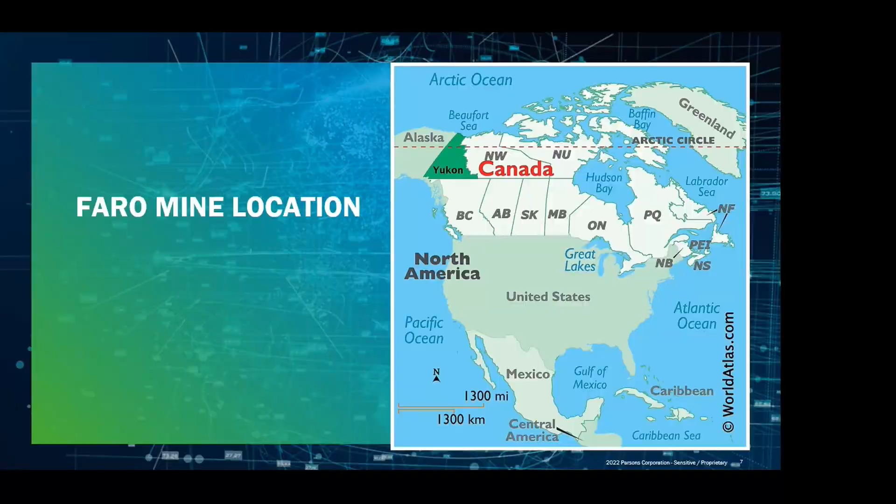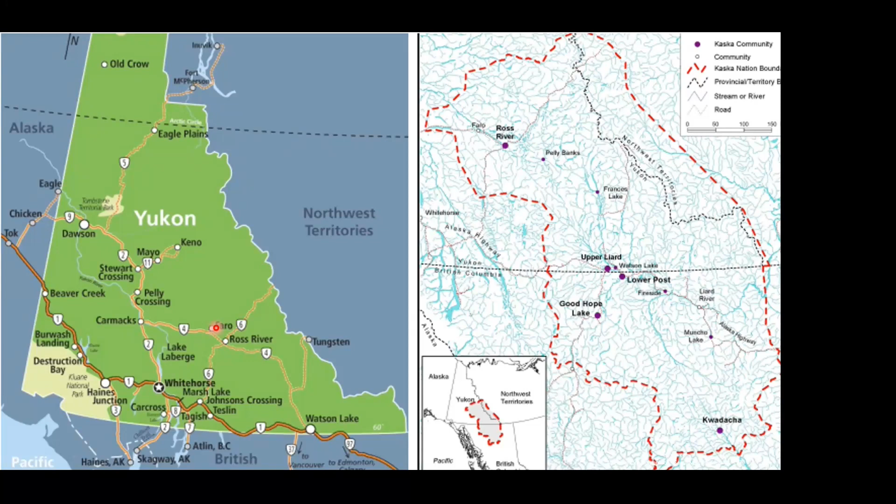The map on the right is of Kaska traditional territories. The red dotted line is the Kaska territory boundary, and the Kaska people are joined by 10 Kaska communities, which form the Kaska Dena Council.

The Faro mine operated for 30 years between 1968 and 1998. It was one of the largest lead and zinc producers on the global market during that time. The Faro mine complex is approximately 25 square kilometers or 10 square miles. In 1998, the owner declared bankruptcy and the Faro mine was abandoned.

In 2003, the Faro mine was identified as a shared responsibility between the government of the Yukon and the government of Canada. In 2018, the government of Canada took sole responsibility for the care and maintenance of the site. Between 2016 through March 2022, Parsons was the care and maintenance operator at the Faro mine. Recently, Parsons won the main construction manager (MCM) contract for the long-term remediation of the Faro mine, with contracts starting April 1st of this year.

The mine was constructed using historical mining practices and left behind some legacy mine infrastructure, such as a large tailings facility, waste rock piles, and open pits and dams. There's approximately 70 million tons of tailings on the site, 320 million tons of waste rock. The Faro mine remediation project is considered one of the most complex abandoned mine cleanup projects in Canada. The long-term remediation is expected to take approximately 21 years to complete.

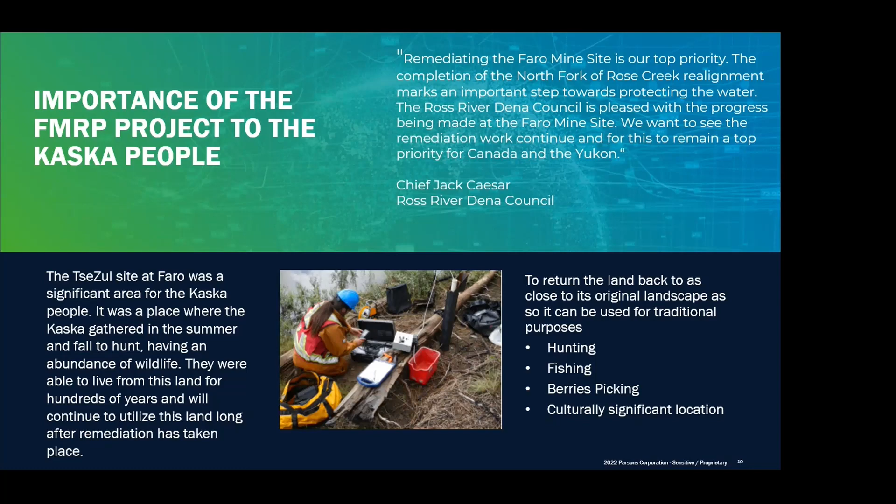The North Fork Rose Creek diversion was initially a part of the longer-term remediation phase of the project. However, it was completed as an urgent work package under the care and maintenance contract due to degrading water quality and to protect the downstream environment. In 2013, routine water quality monitoring identified an upward trend in the zinc concentrations at the final compliance station on Rose Creek as the water leaves the mine area and heads into the downstream environment.

In 2015, a seepage collection system was installed as an interim measure in the North Fork to collect and reduce zinc concentrations. The North Fork diversion channel designs were expedited and completed, and in 2018, the construction of the diversion channel commenced. And on October 24th, 2020, the construction was completed and the NFRC was commissioned, resulting in an immediate reduction of zinc concentrations at the North Fork compliance point and the downstream Rose Creek compliance point.

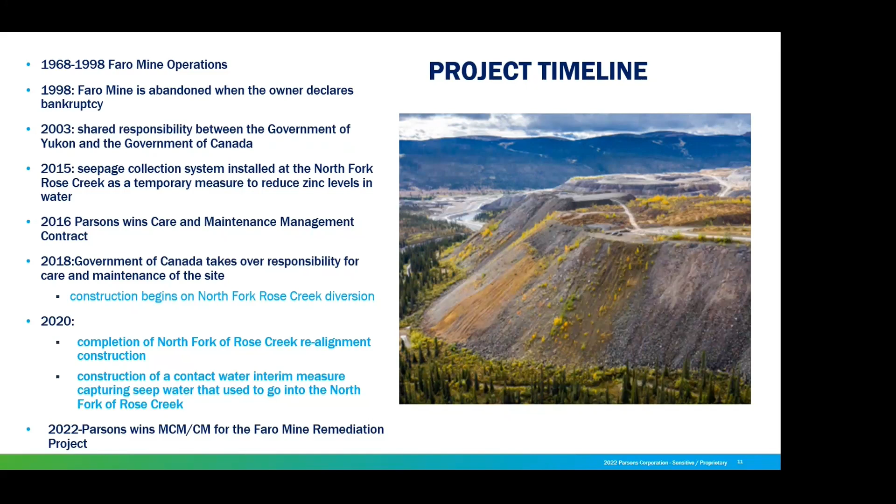The project is currently undergoing an environmental assessment review and is expected to receive an EA certificate between 2024 and 2026.

And having some technical issues here again.

Which are the main parameters of concern in the North Fork area, and were the ones that drove any non-compliance prior to the construction of the North Fork of Rose Creek.

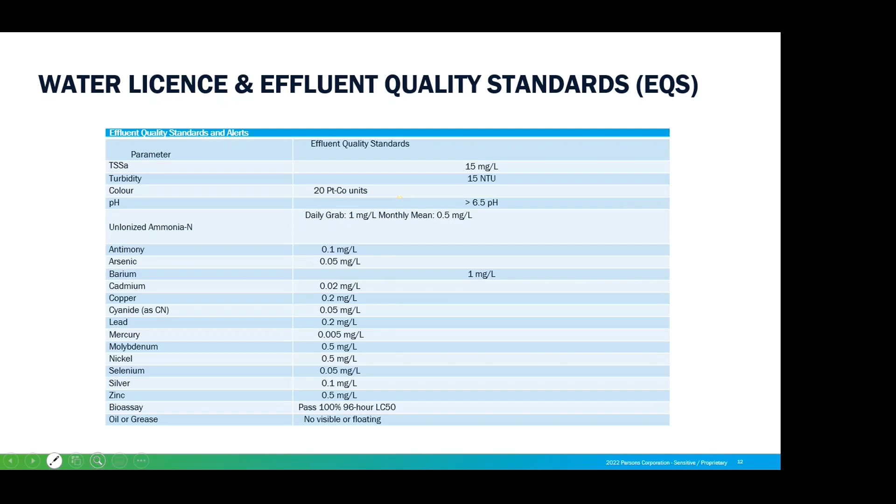In combination with meeting the EQS, we use an adaptive management approach, which means we can be more flexible. The Faro mine is complex, and experience has shown us that it's impossible to foresee all situations that may arise. By monitoring the site, we can watch contaminant levels and take early action if we anticipate that unacceptable levels of contaminants may enter the downstream environment. These are called AMP triggers and work in a gated approach. Green is no effect, yellow is caution, and red is having a downstream impact.

The NFRC project, or the North Fork Rose Creek Diversion Project, objectives and approach is the physical separation of the contact and non-contact water streams, which is provided by a 1.9 kilometer long engineered channel. A non-contact water diversion channel intended to convey non-contact water from the upstream and separate this water from the waste rock dumps impacted seeps. The contact water collection and conveyance system intended to collect water from the waste rock dump impacted seeps flowing into the NFRC and transport it for temporary storage and later treatment.

Alteration of the NFRC required a Fisheries Act authorization, including fisheries habitat compensation measures. The project proceeded under urgent work, so no other regulatory review was required. The main design objective is for the water quality at the monitoring station NF-SW1010, which is located at the North Fork of Rose Creek Mine Access Road crossing, to meet water quality criteria, or the EQS.

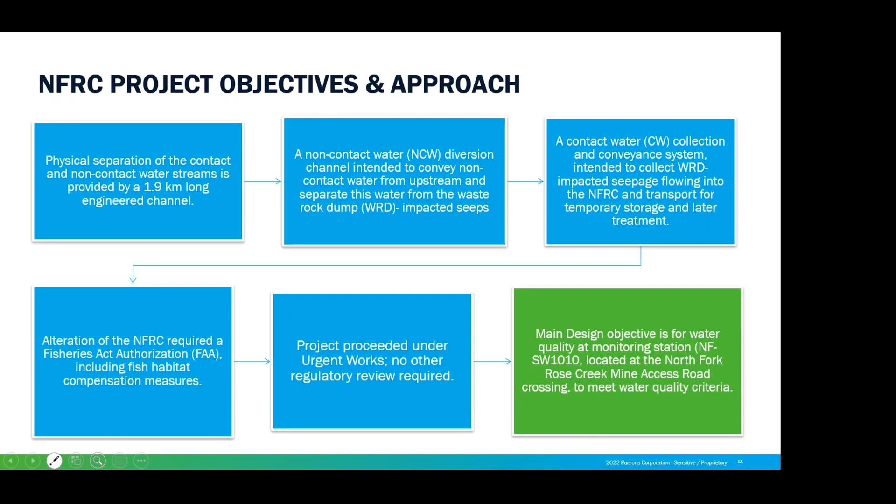Historically and currently, the North Fork of Rose Creek supports significant populations of Arctic grayling, burbot, slimy sculpin, and round Arctic whitefish. The NFRC was electrofished prior to the commencement of the realignment project, and fish barriers put at either end so the fish could not pass and re-enter the creek while there was construction.

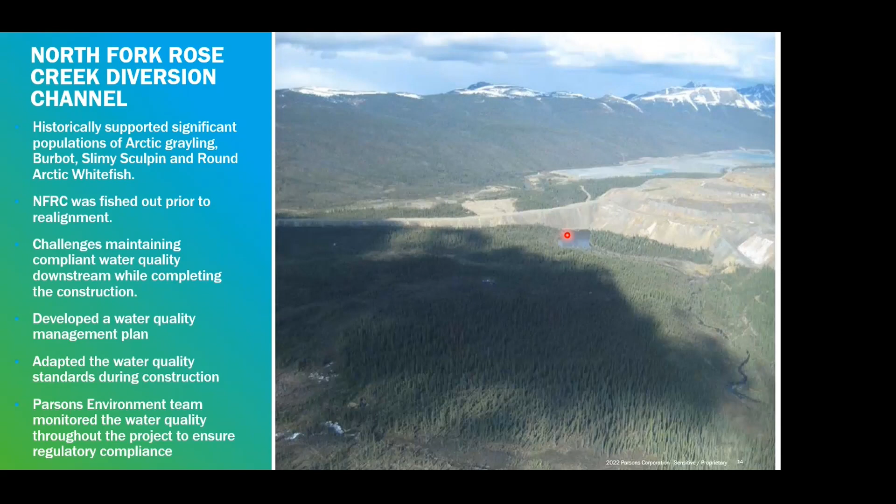There were challenges maintaining the EQS compliant water quality downstream while completing the construction. So a site-specific water quality management plan, policies, and procedures were developed and followed during the construction. Parsons' environment team monitored the water quality and conducted fish toxicity testing throughout the project to ensure regulatory compliance and ensure the aquatic habitat was protected. Parsons also operated an on-site water quality lab, so analysis could be completed quickly and any water quality issues mitigated immediately. During the construction of the North Fork Rose Creek Diversion, over 5,000 water quality samples were run through the on-site lab.

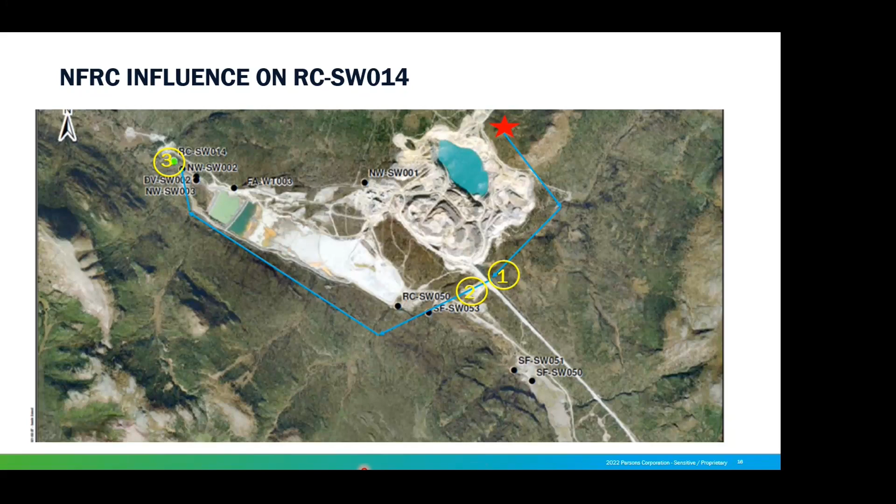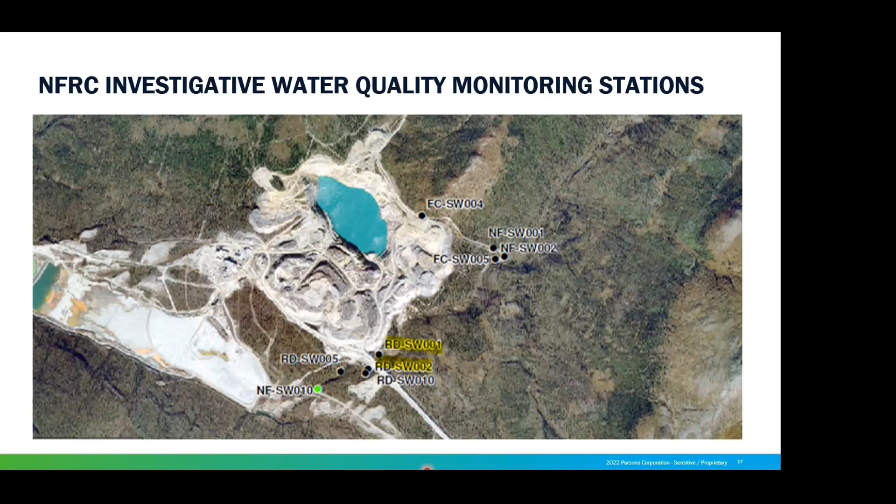Metal leaching and acid rock drainage, or MLARD. I'm going to talk a little bit about that. The Faro mine was constructed between 1968 and 1998 when historical mine planning practices were utilized, which did not necessarily plan for closure or test for geochemical characteristics of the mined rock, and did not identify appropriate storage of the rock, and so they were sort of mined out and placed beside the pits and in large waste rock dumps.

Current mine design plans for closure prior to the construction phase, where non-acid generating rock, the new word NAG for non-ARD rock, and PAG, potentially acid generating rock, is segregated, and PAG rock is stored in lined facilities, which protects against MLARD until final closure.

Acid rock drainage is produced by the oxidization of sulfide minerals, mainly iron pyrite or iron disulfide. This is a natural chemical reaction which can proceed when minerals are exposed to air and water. Acidic drainage is the result of naturally occurring processes, including weathering, the water cycle, and industrial activities associated with land disturbances. Mining is a big source of ARD because in the mining process, acid-forming minerals are brought to the Earth's surface and exposed to natural weathering processes, whereas normally they would remain deep in the Earth, held in anoxic environments, which are free of oxygen and protected from the atmosphere.

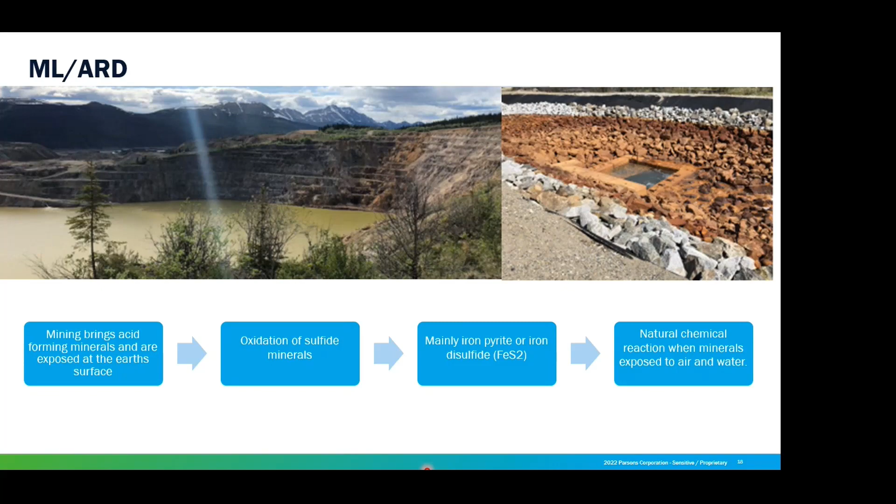This is a slide which shows you the main sources that cause MLARD, the pathways, and which receiving environments are impacted. The sources: you have your tailings, waste rock stockpiles, ore and low grade ore stockpiles, heap leach materials, the pit walls and underground workings, which we do not have at Faro.

Your pathways are runoff, infiltration through mine waste, infiltration through soil or vadose zones, groundwater, surface water, uptake by biota, and movement of mine waters and in the air. The receiving environments are the groundwater, surface water, air, soil, and sediment. At Faro, we do have surface and groundwater plumes that have been impacted by ARD.

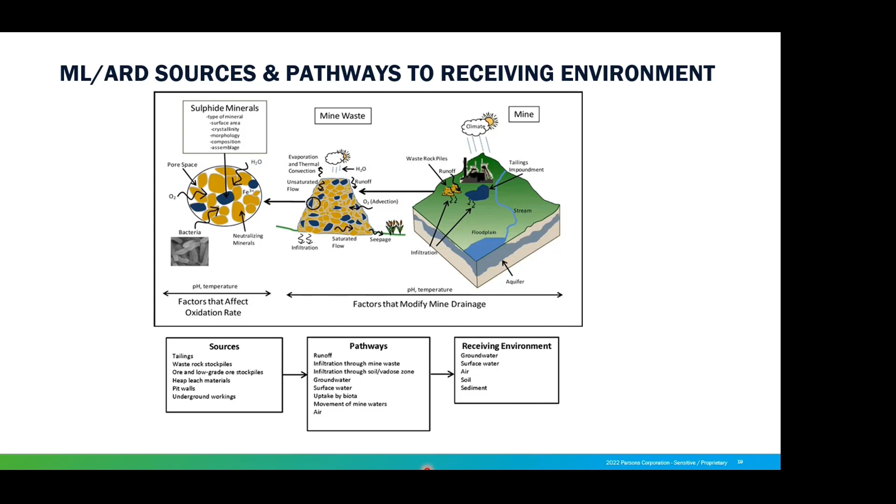The impact on aquatic life: when fish are exposed directly to metals and H+ ions through their gills, impaired respiration may result and cause chronic and acute toxicity. Fish are also exposed indirectly to metals through ingestion of contaminated sediments and food items. Iron hydroxides and oxyhydroxides may physically coat the surface of the stream sediments and stream beds, destroying habitat, diminishing availability of clean gravels used for spawning, and reducing fish food items such as benthic macroinvertebrates.

Acid mine drainage, characterized by acidic metalliferous conditions in water, is responsible for physical, chemical, and biological degradation of stream habitat. Water contaminated by acid mine drainage often contains elevated concentrations of metals. And on the right, you can see that the metals can also biomagnify through the food chain.

Daphnia, or water fleas, are what we test for at Faro, as well as rainbow trout. They're very sensitive species to all types of environmental pollutants. But as you can see, if the water fleas are ingesting a metal, then there's uptake into the small fish, into the larger fish, and up to the higher trophic levels of bears and eagles. This is a picture of an environmental monitor taking a water sample at Faro.

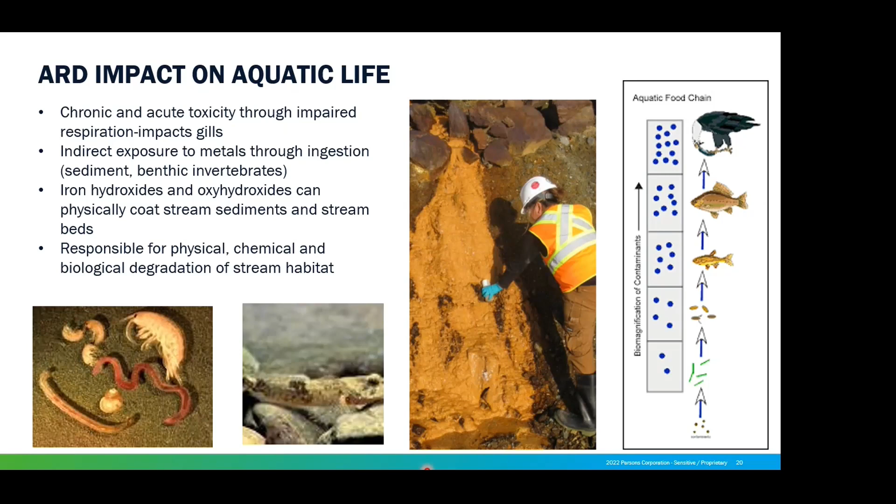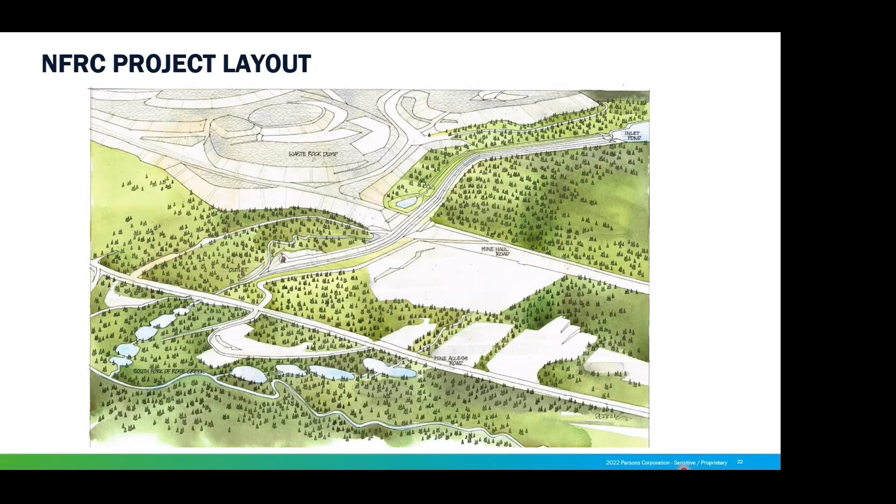I'm going to actually flip through a few slides here because it's not showing the proper presentation. That's my technical issue today, so bear with me.

This is a picture of the NFRC project layout. It's an aerial view looking southwest. You can see here, this is the channel that flows next to the waste rock dump. It pools at the inlet pond and then passes through this haul road or waste rock dam. This is showing the cuts in the haul road. Eric's going to talk about that in a little more detail next. And this is the waste rock dump here, and in the far distance, the Rose Creek tailings facility.

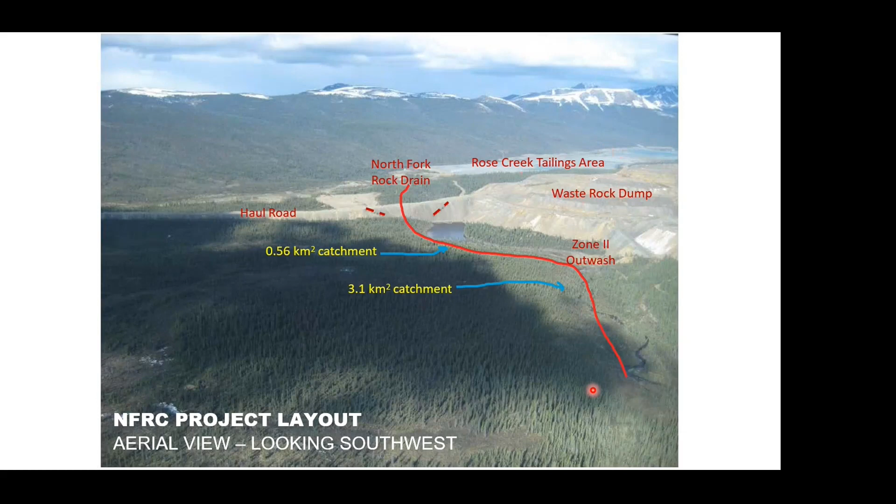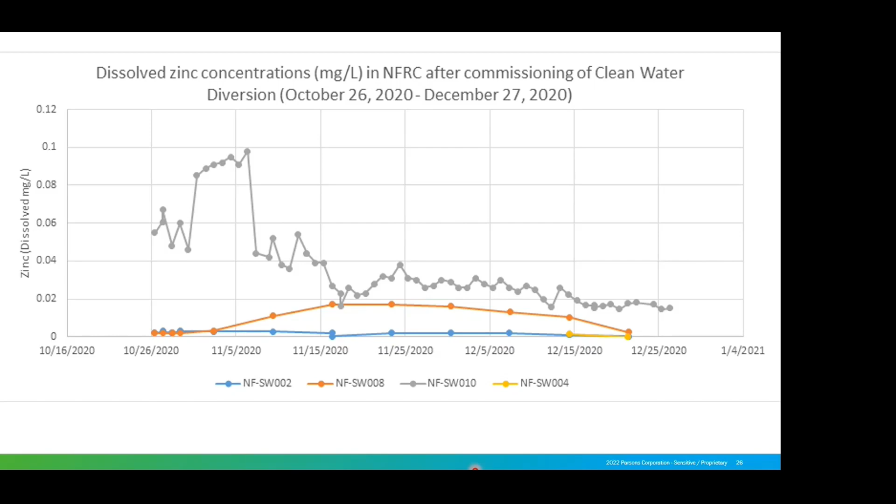So on October 26th, at the beginning of the graph, this is when the North Fork Clean Water Channel was commissioned. If you focus on the gray line, again, apologies, something happened with my slides. The gray line, this is at the NFSW 010 at the compliance point. And you can see that we had kind of stable zinc concentrations. Once the channel was commissioned, we had a spike, which we believe was some sediments washing through. And then you can see over the next month, we had a drastic drop in the zinc concentrations in the channel.

So the improvements to the aquatic habitat and fisheries compensation, I'm just going to speak to that on my last slide before I hand it over to Eric. We saw an immediate reduction of zinc when the diversion channel was completed. There were improvements to the aquatic conditions. The fish toxicity testing increased, and we increased the water quality testing, which showed us that the general health of the habitat showed improvements immediately and over time.

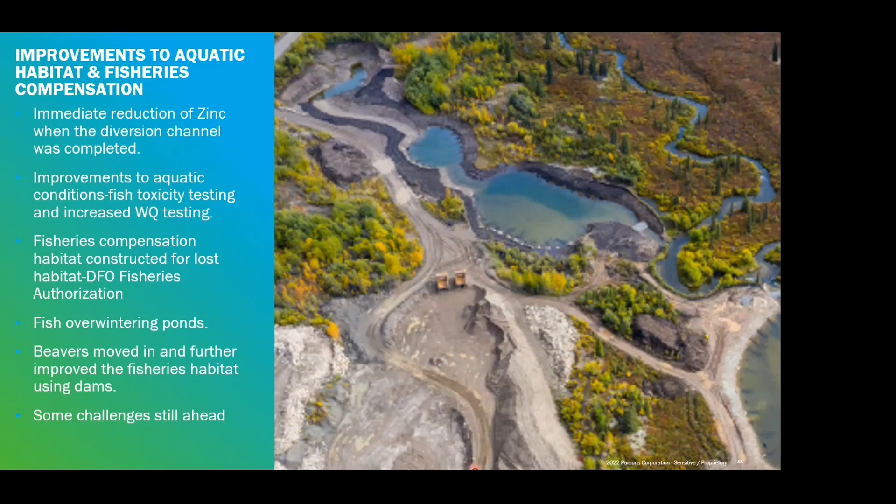This is a picture of the fisheries compensation habitat that was constructed for the lost habitat as a part of the fisheries authorization permit. It's some 3 fish overwintering ponds and a little bit of Canadiana at the end. We have beavers on site. They normally need to be removed because they dam up water bodies and can cause infrastructure issues. However, in this case, they won and their dams created even better fisheries habitat. That said, there's still some challenges ahead, and I'm gonna hand it over to Eric, and he's gonna talk about the construction piece.

Yeah, thank you, Karen. So, just to continue on the good presentation that Karen started, as part of the actual construction of the new diversion, there were some related work packages that we had to put in place to be able to actually execute that huge heavy civil work at site. There's 20 of them, but I will not go into details on each of them. But on the high level, we had to construct a construction diversion because we needed to keep the water flowing while constructing the new diversion.

We needed to construct access roads to be able to haul all the granular material that was required to construct the diversion, because it was not just an excavation, it was a cut and fill, and we were in the negative, so we had to import the good granular material to construct the diversion and the sides of the diversion. Also, we had to construct the inlet and the outlet, so to block the actual original alignment.

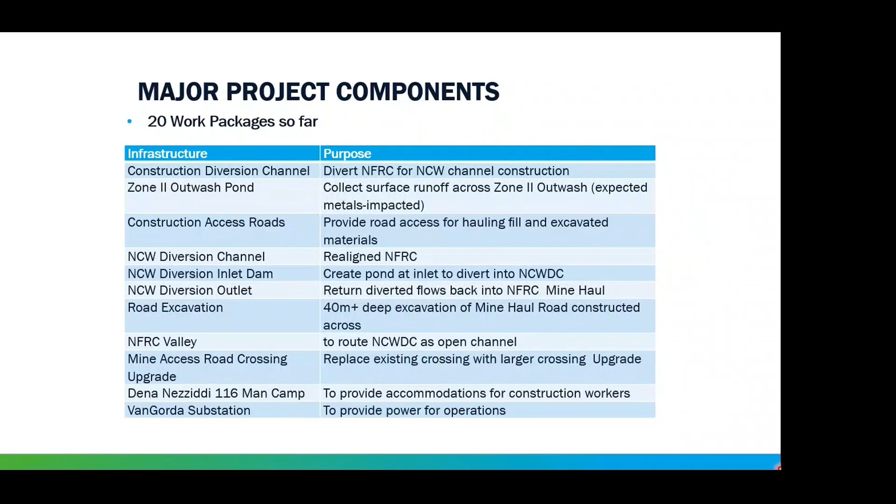Thank you. So we had to construct the overwintering ponds as fish habitat compensation. We needed to salvage the fish and construct a fish barrier. So all those were work packages that Parsons had to tender out to public bidders to have them do that work.

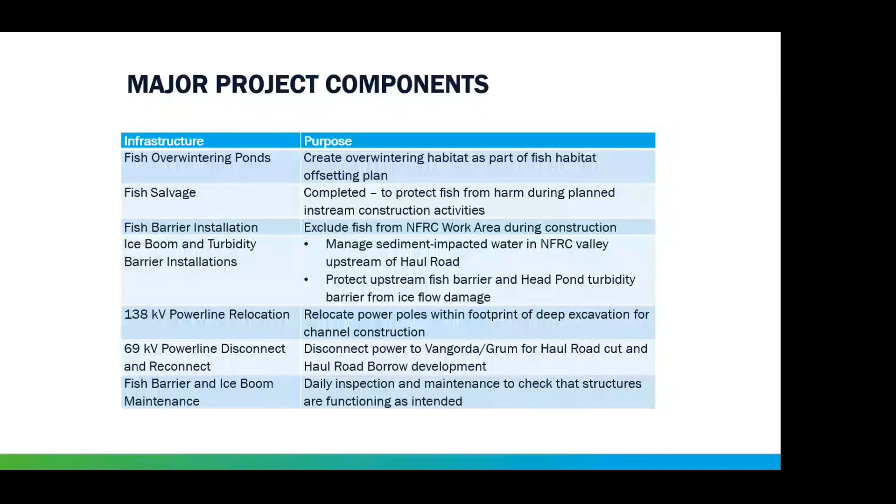Okay, and we're still, yeah, additional power line work, fish barrier. Okay, so those are the major work packages associated with the actual construction of the North Fork of Rose Creek. Next slide, please.

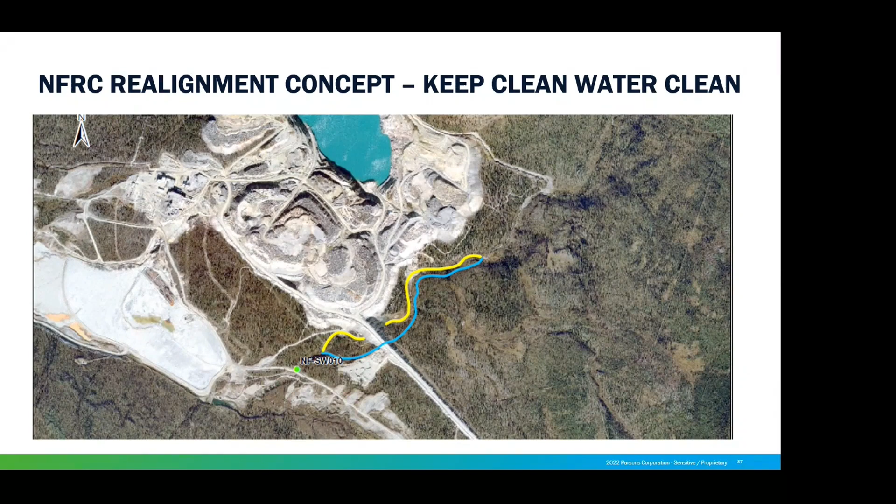As Karen mentioned, the idea was to keep the clean water clean and contact water away. The project was not only to move away the diversion, because water is migrating and we can still be in contact. So the way it was done, we kept the actual new diversion at a higher elevation, and all that new diversion is lined from one end to the other. So you'll see in the next couple slides, there's some liner work that was done.

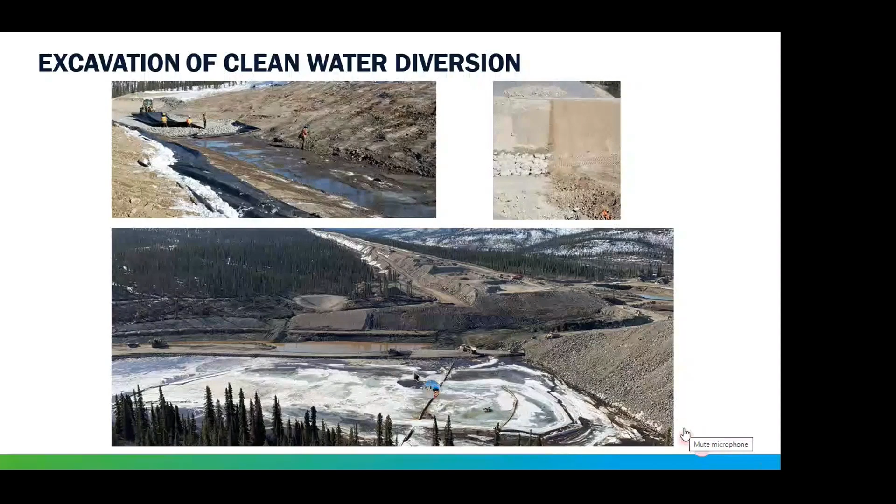Oh, it's not working. I think you have to advance it, Eric. Okay, where do I click for this? Oh, I don't know who did that, but that's good.

It's working. So as I was saying earlier, we're constructing the side of the diversion. You can see here the dozer is pushing sand. That will be the bedding material to receive the geomembrane on top of it, because we need to protect the geomembrane and provide a material that is self-draining and that is fine enough to not generate any punctures through the impermeable barrier.

And that material was put in place with a dozer, compacted with packers, and you can see a lot of work activities at the bottom here. Next slide.

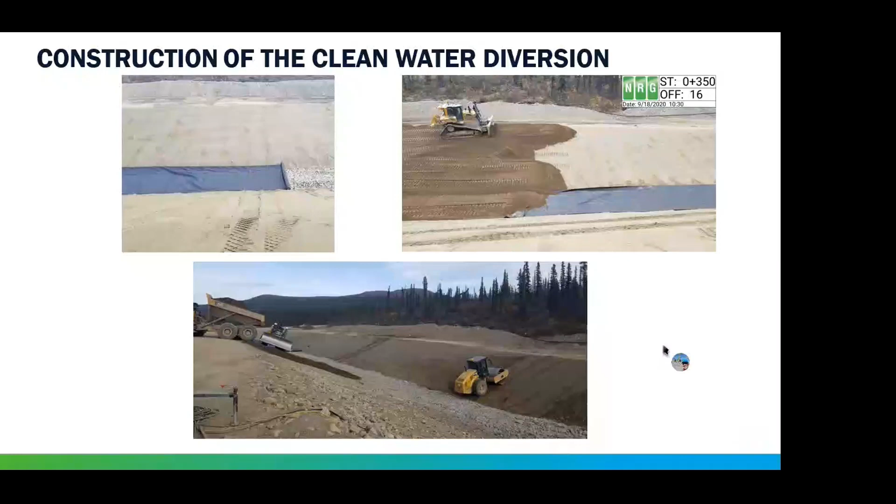Thank you. So you can see in the top picture the placement of the bituminous membrane. That membrane was welded in place. You can see the propane tanks and the workers who are torching the membrane, and as part of that, there was a huge QA/QC program that was testing those welds and seams to make sure that they were done properly.

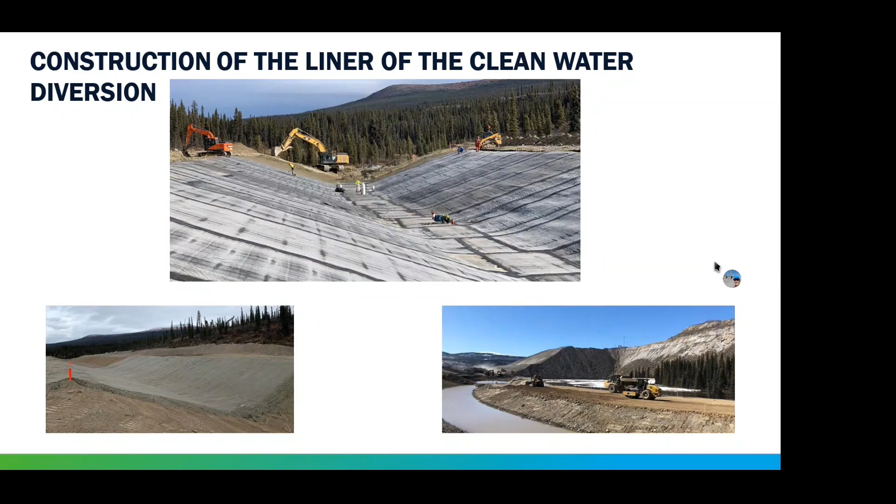So, an aerial view of the work. In the foreground, this is the construction channel, which was conveying the water of the North Fork of Rose Creek during construction of the new diversion that we see on the back side here. We can see some haul rock trucks that were bringing material over a construction bridge to the work area.

And you can see here a culvert that is capturing and conveying the water from the upstream side, because water, the runoff, is still flowing from here. So we had to capture the runoff and bring it to the construction channel to be able to work in the dry. You can see on the bottom right the placement of the riprap was completed, while upstream of that culvert they're still working on the membrane.

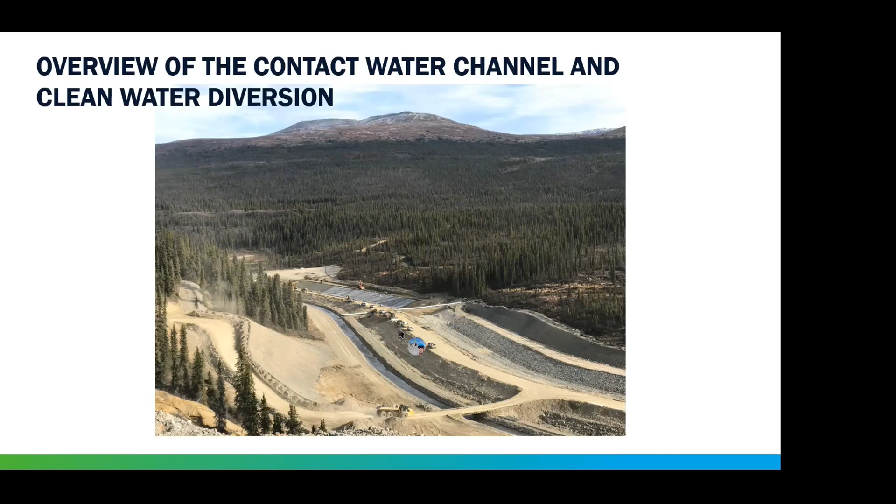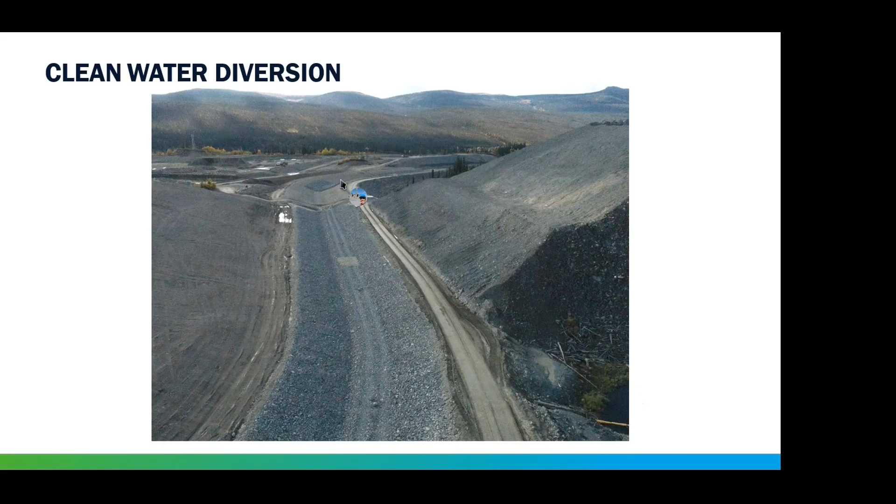So here we see a good picture of the actual cut in the haul road. That generated a huge amount of clean material that was reused and repurposed for the construction of the diversion. On the bottom right here, we can see a bit of the actual head pond. The contact water and the natural flow of North Fork Rose Creek is still flowing here under the remaining haul road through the rock drain while we're finishing the work on the new diversion.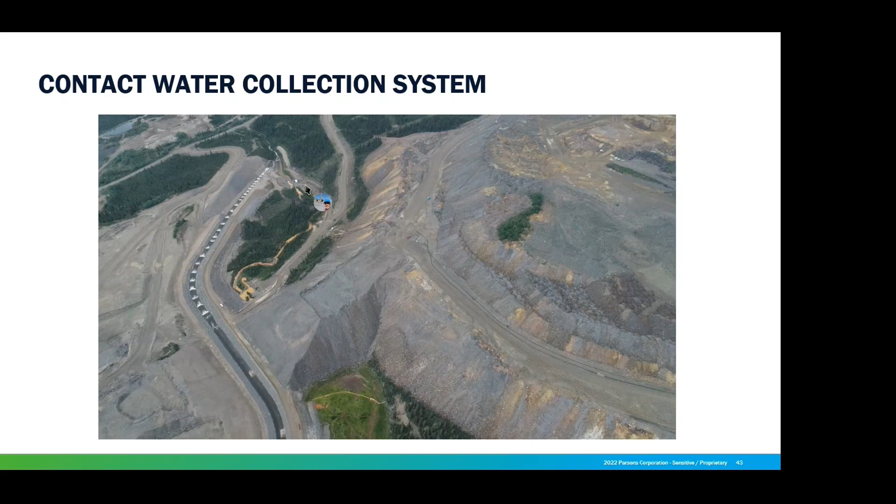Next slide, please. So we can see here, this is the pump house, under which there's a sump that is capturing, through a drain under the original channel here, the shallow groundwater and part of the surface water. We're pumping that water at a maximum flow of about 20 liters per second through that pipeline we can see here, uphill back to the Faro pit.

In addition to that, we have here another set of interception systems that were there prior to the new diversion. And we have another sump interception system in this area that is capturing water and moving it back to the Faro pit to be treated later on in the season. This system was fully commissioned in May 2021. So it took about 5 to 6 months after the actual opening of the new diversion to fully commission that system. Next slide.

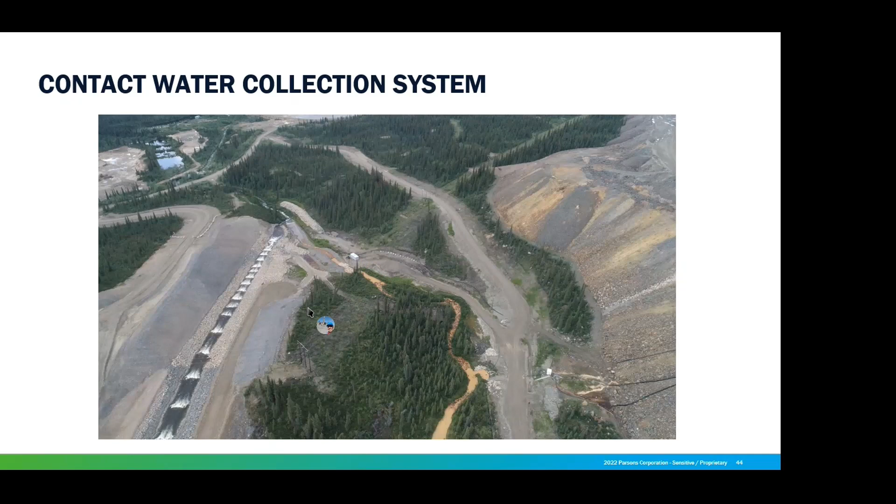As a conclusion regarding the new construction, the North Fork Rose Creek Diversion Project separated the clean water from the mine-impacted water. The zinc levels decreased and were below the effluent quality standard at the compliance point, which Karen showed you. The overall downstream water quality improved immediately. The aquatic habitat and fish health improved also. And the fish habitat compensation plan also added improvement to the fish habitat.